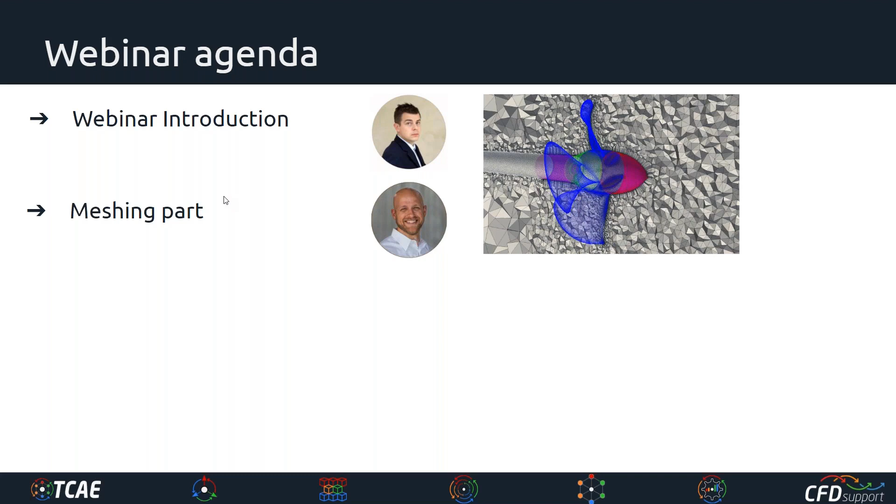So here's the agenda of today's webinar, it's simple, there will be 4 parts. In the first part, there's this webinar introduction, which is approaching its end. There will be a meshing part where Daniel will show us how it works with Pointwise. Then there will be the simulation part where Radek will tell us about the simulation. In the last part, as announced, there will be a Q&A session dedicated to your questions and answers. Feel free to ask your questions, and we will be happy to answer some right away in the webinar, and the rest will be answered later via email.

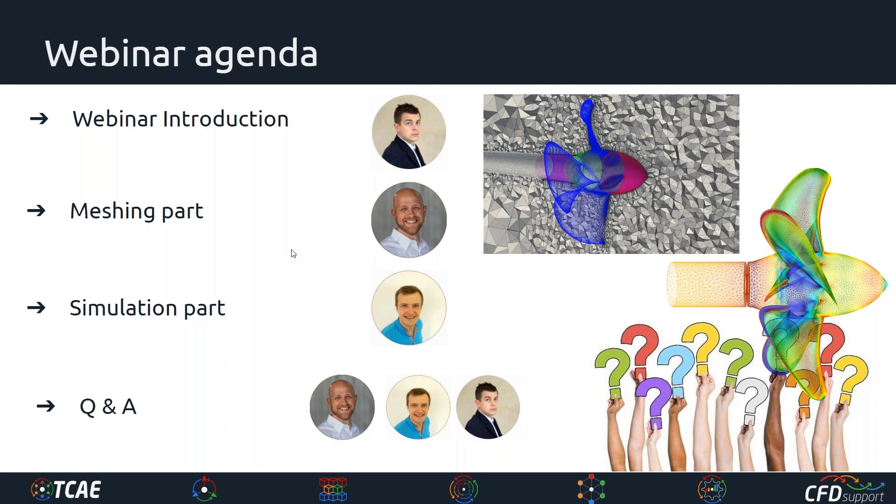Okay, so that's the agenda, and I'll say a little bit about the objective. In the beginning, we wanted to make something quite transparent and available. We wanted to show a very advanced simulation on a very advanced mesh created in Pointwise, showcasing the very best of CFD simulation. We were looking for an appropriate test case, and we found this.

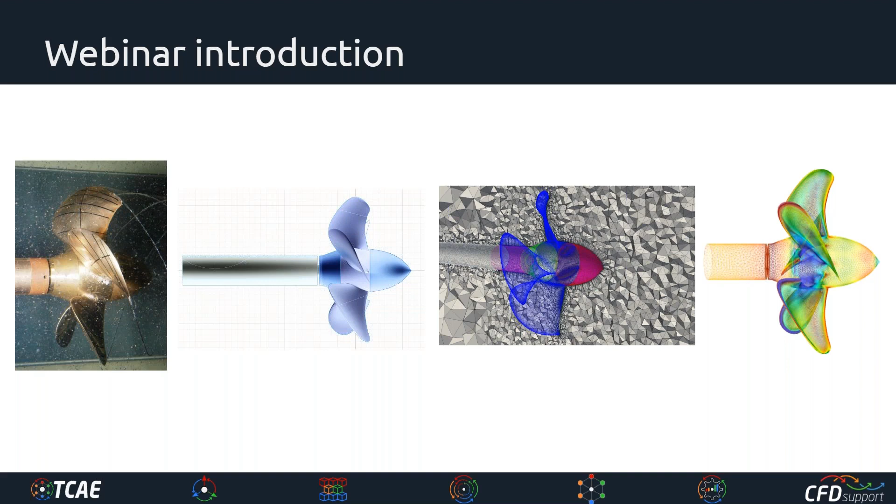Potsdam Propeller test case, which is very good for our purposes because it has been measured. It's a real facility, measured in SVA Potsdam, in Germany. So the measurement data are available, the geometry is available, and the whole case is extremely transparent and clear, repeatable anytime. It fits our purposes very well, because a typical benchmark has an issue of confidentiality, since the data is typically the client's and untouchable. This one is transparent, and the beauty of this test case is anyone can take it and repeat it anytime, checking again and again how it works and what its performance is.

So what we did is we asked our friends at Pointwise to create the mesh, and here at CFD Support we ran the simulation. We'd like to show you how it worked and what the results are.

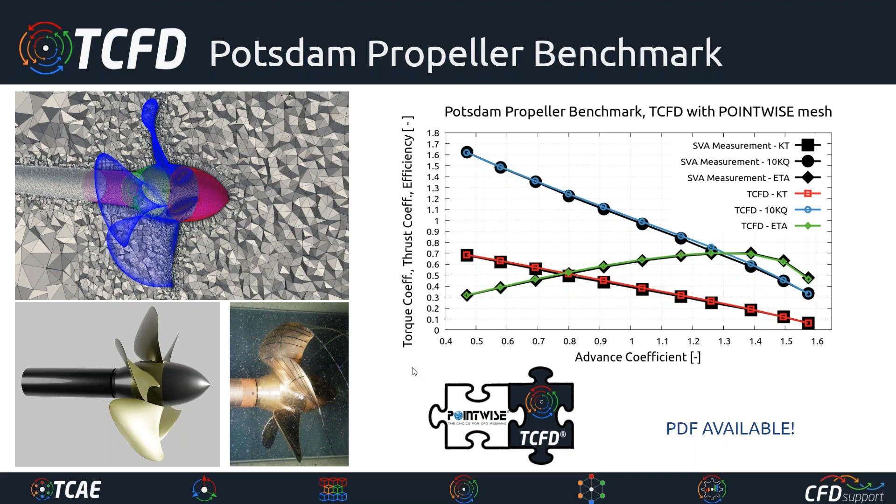Okay, so now it's time for the meshing part of the webinar. I'll hand over the presentation to Daniel.

Perfect. All right, so as Lubo said, my name is Daniel, and I'm a lead application engineer at Cadence Design Systems. We have been developing Pointwise, a program that's been in development for over 25 years, and I was responsible for the mesh.

To start, I'll show the whole flow domain. I used dimensions here in terms of the diameter of the propeller rather than raw dimensions, because Pointwise is dimensionless. It could have been dimensioned in meters, feet, inches, miles—we don't really care, as long as it's all relative to itself.

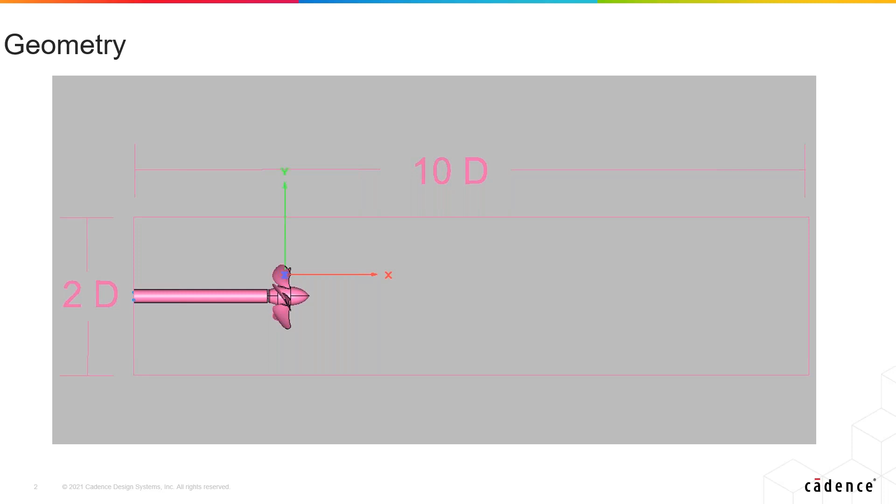Speaking about the CAD itself, for the most part it was pretty solid and good—most surfaces were rather smooth. We did have one area at the edge of a blade, and of course there are 5 of them, where it left a little to be desired.

Usually when you bump up against rough CAD like this, you have a few options. If you have a good CAD package, you can take it in and fix it, or talk to your CAD guy and ask him to fix it. We have a few tools in Pointwise that can handle this, but for this instance I used a different technique called fault-tolerant meshing, in which we put a smooth grid over top of this rough-looking CAD and then grow the volume domain from there. Pointwise is a bottom-up mesher, so we can do that.

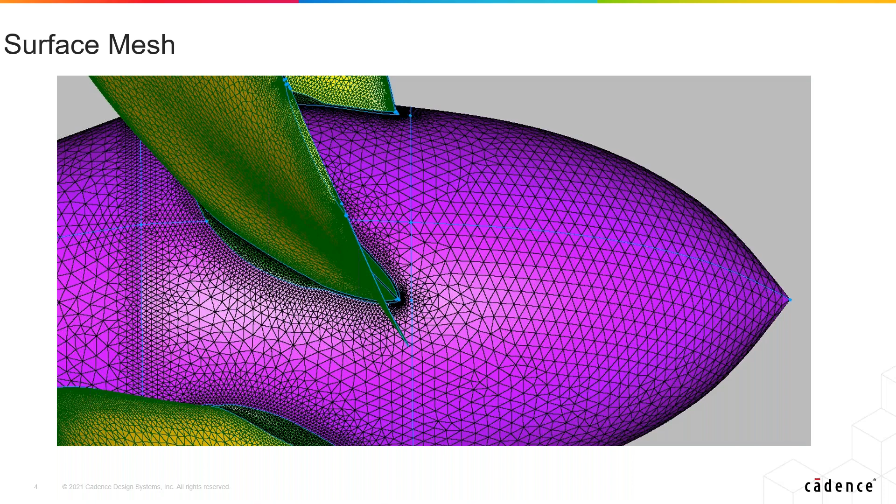Which gets me to the surface mesh. We used the Delaunay algorithm for the isotropic surface mesh, triangles only. Pointwise can handle mixed cells—we could have done combined cells here—and there are also other algorithms available in Pointwise, such as advancing front ortho. But for this, we mostly stuck to Delaunay and kept a fairly high boundary decay.

So what that means is that the number of points on the boundary, on these blue lines, carry fairly far into the domain before they start broadening and getting bigger.

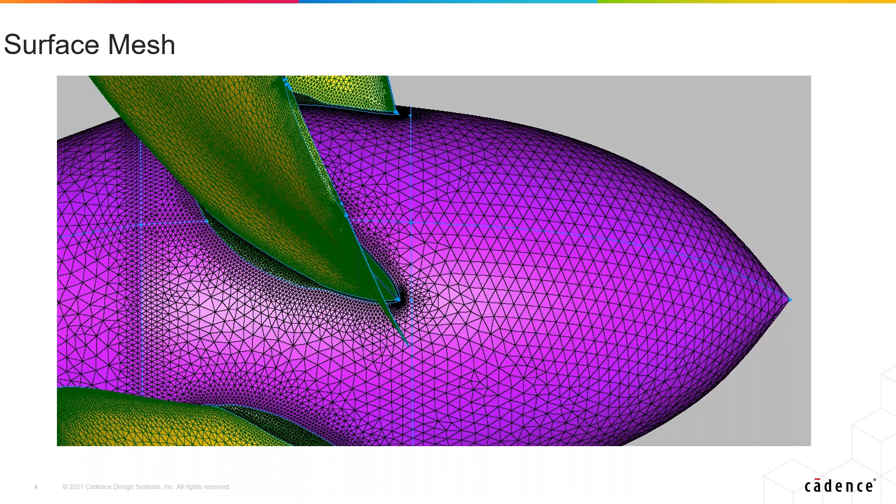For areas of high curvature, like on the blades, we use a technique we refer to as T-Rex. In 2 dimensions, the user can specify an initial step height, and anisotropic triangles are grown off a boundary edge. The user can also specify the growth rate, and these anisotropic triangles are gradually stepped until they reach isotropy, at which point the Delaunay algorithm takes over for the remainder of the area. You can see it's done here on the gold portion, marching in all the way to isotropy.

The green portion is the fault-tolerant technique I referenced a couple slides ago. For this technique, we laid a structured domain over it, then took that structured domain and cut each cell in half to make 2 triangles. It's a tool we call diagonalization. You can see that was done here in green, on the green portion.

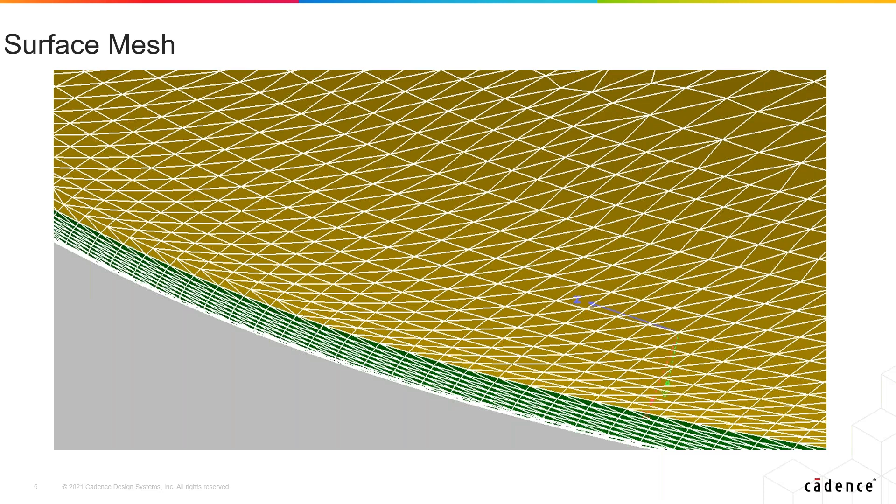Overall, we had about 600,000 surface cells with a maximum angle of a little more than 130 and a maximum area ratio of a little less than 4. Overall, we were happy with this surface mesh. That was a really strong quality surface mesh.

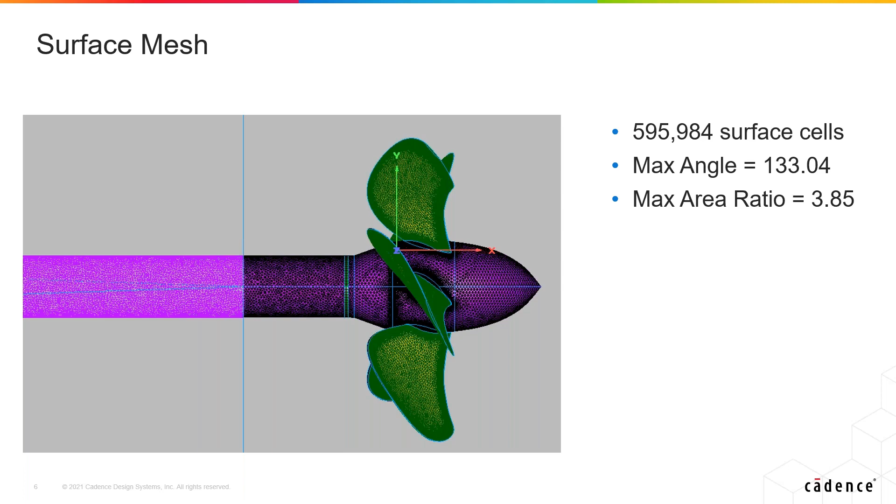And with that, we built our volume mesh. This is a cut straight through the propeller, and you see there are 4 different cell types utilized here. The first I'll talk about is the red tetrahedrals, which make up the bulk of the domain once you get away from the propeller itself.

The prisms, shown in green, are formed by that same T-Rex algorithm, but rather than in 2D, this was in 3D. So rather than stepping to make triangles, a 2-dimensional shape, these step to make anisotropic tetrahedrals. Same situation - the user can specify the initial step size, the growth rate, and even set specific stop criteria, so the algorithm can stop locally rather than as a universal front. That's why you may see little areas where the prisms extend a little further into the mesh. Again, the goal is to reach isotropy, and then it transitions to tetrahedrals.

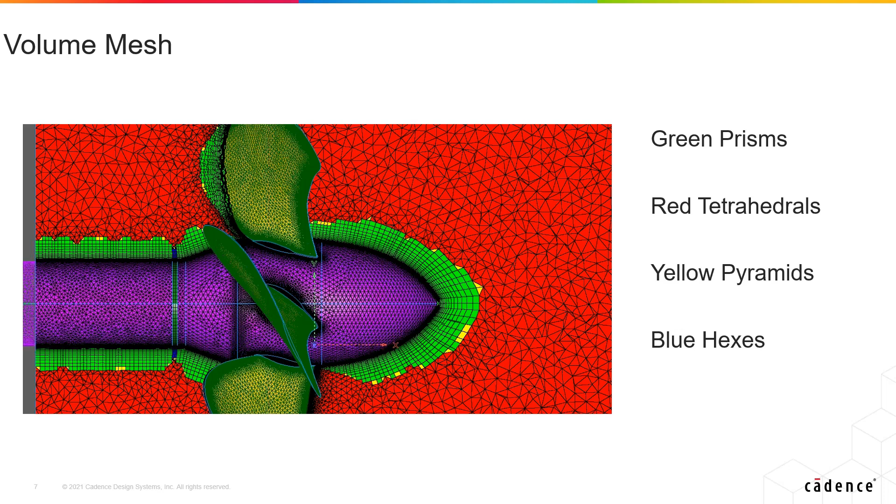After all of the anisotropic tetrahedrals are created, they're combined for cell reduction to make green prisms. If the T-Rex algorithm is grown off of quadrilateral cells, the cells are then combined to make blue hexes, which explains why there are a few blue cells around the shaft. The yellow pyramids are there simply for transition regions to go from prisms or hexes to the tetrahedrals.

For a picture of the greater flow domain, we have the region around the prop, which we already discussed - there's about 12 million cells there. A little further downstream, there is a rotating reference frame region, made up exclusively of tetrahedrals, with about 2.6 million cells there.

Outside of that is the stationary region, which is mostly TETs. There are a few prisms adjacent to the shaft, again using the T-Rex algorithm and some cell reduction, so we could capture any boundary layer phenomena there.

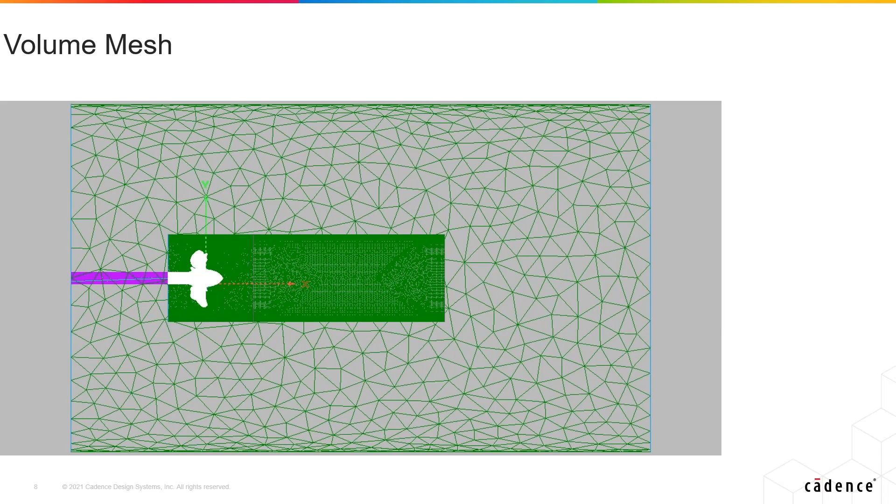And that brings us to the stats. All told, there was about 17 million cells for this mesh. The maximum angle was a little less than 170, and the average was closer to 100. The maximum volume ratio - we did have a few outliers closer to 30, but that was atypical. Most cells are closer to an average of 1.5, and the maximum centroid skew was about 0.86, but the average was closer to 0.123. This image shows a nice look at how T-Rex can be stopped locally and then grown to much further distances away at other locations.

So with that, I will pass it back to Lubos.

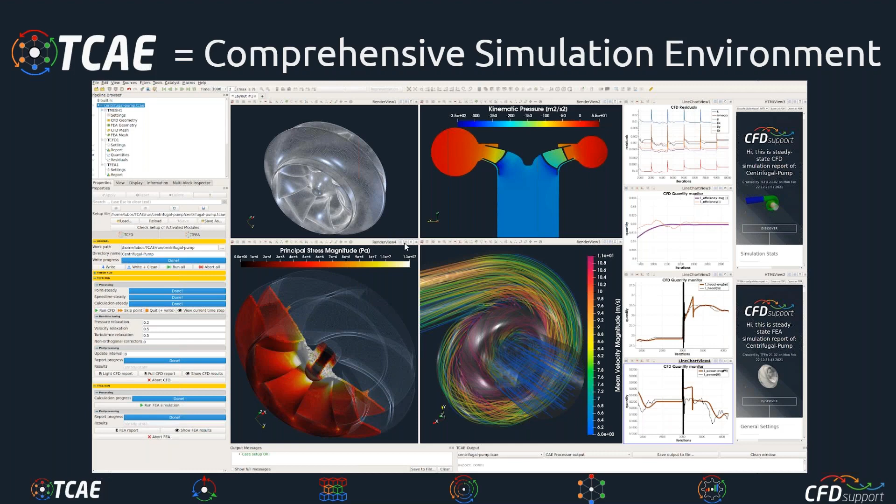I guess you know our company CFD Support was founded in 2009, and it's located in Prague, Czech Republic. Our main field is simulations, primarily CFD and FSI simulations of various engineering problems across the industry. Our golden egg is a product which is the simulation tool - we sometimes call it a simulation environment, because there are a lot of components you can combine and play with. In fact, it's a set of standalone software pieces, which we call software modules, and you can combine them together. No matter what other pieces of software is used together with it, it still works very well with various commercial codes, in-house codes, and other open source.

It's based on open source, which is common knowledge. And TCAE has a strong integration ability, so it fits existing workflows, and it's definitely ready for big industrial challenges nowadays.

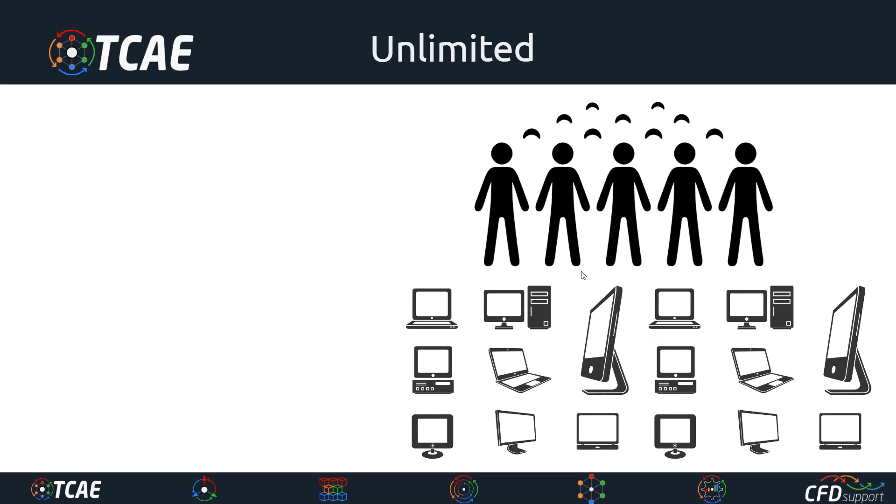I'll be very quick here, because Radek is waiting for his part. I know it. So I'll just mention very quickly that TCAE is special because it's unlimited in terms of number of users. There are no limitations in jobs, cores, and hardware installations. So it's quite attractive for these reasons, because users can use their resources to the fullest.

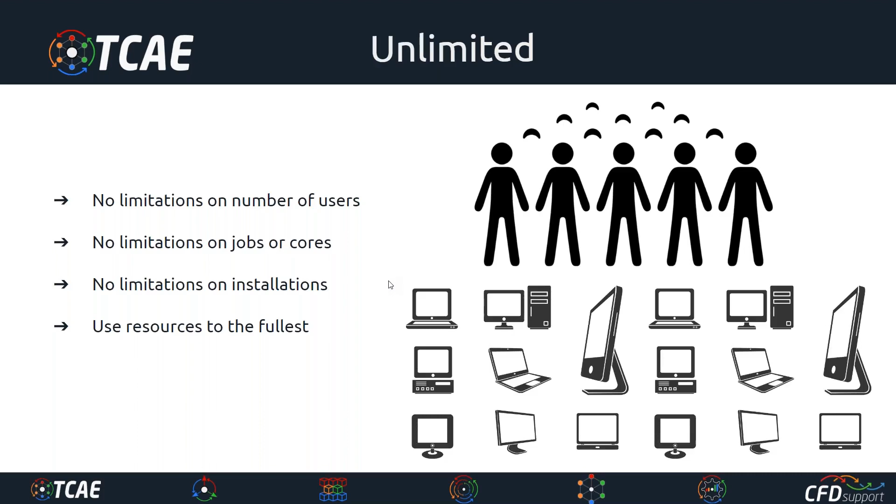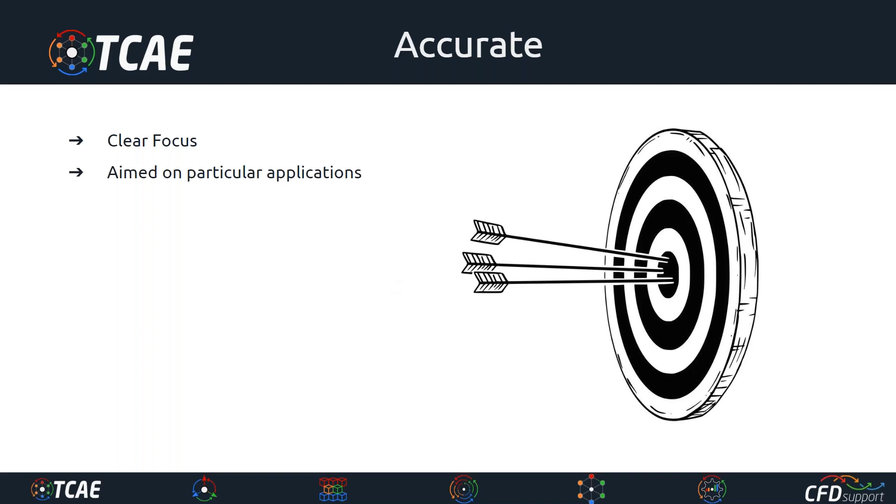And it's definitely accurate because it has clear focus. It's aimed on particular workflows, especially turbo machinery simulations and external aerodynamics. So for this reason, it's aimed and it can be accurate. It's definitely not a general purpose code.

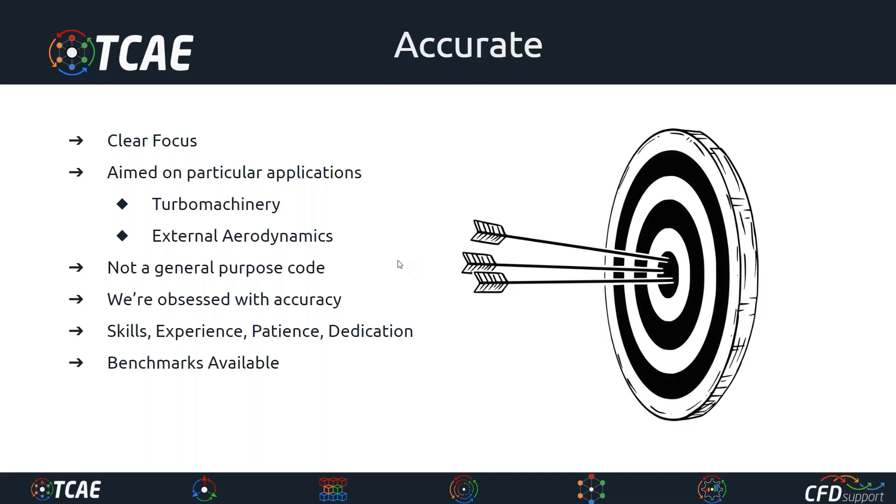Here at CFD Support, we are obsessed with accuracy. We believe that any successful project is a result of skills, experience, patience, and dedication. So it's quite a big deal to do the simulations for the industry. And there are a couple of benchmarks we associate with TCAE, and we are ready to show them, as you can see in this webinar. TCAE is highly automated.

And at the end, it's the user who decides how deep to dive into the problem, or not at all. So it can be used as a black box or as a highly sophisticated CFD or CAE simulation tool. It's the user's decision every time. And yeah, it's always under development.

We have a couple of ways we think about it. In the horizontal direction, we think about new tools, new simulation plugins, new modules, and complexity. And in the vertical direction, we develop TCAE in new applications, capabilities, and high-tech methods.

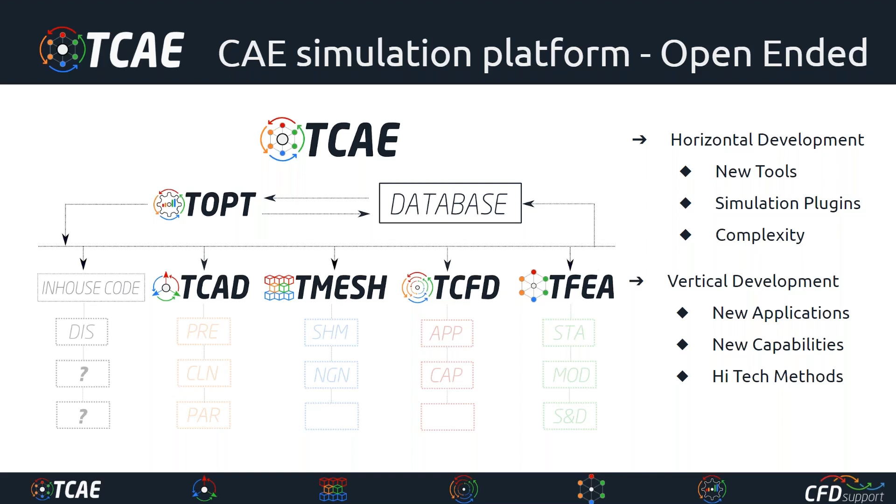In February we had a new release, which was quite big, and we are already working on the new release, which will be released in September this year. We are even working a little bit on the very next release, which is scheduled for February 2022.

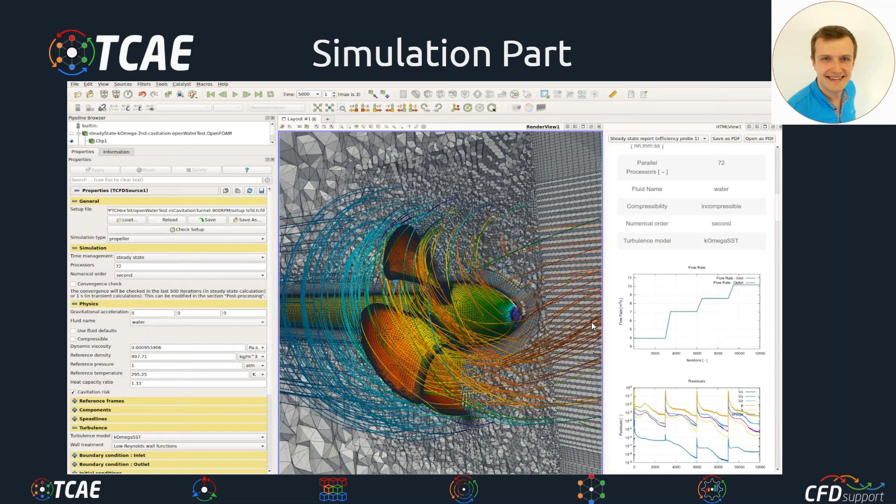Okay, time for the simulation part. So Radek, can you take over, or I will? Yes, so can you give me the presentation? Okay, yes, I will, I'm doing it right now. So I guess we can see your screen. So you can, okay, perfect.

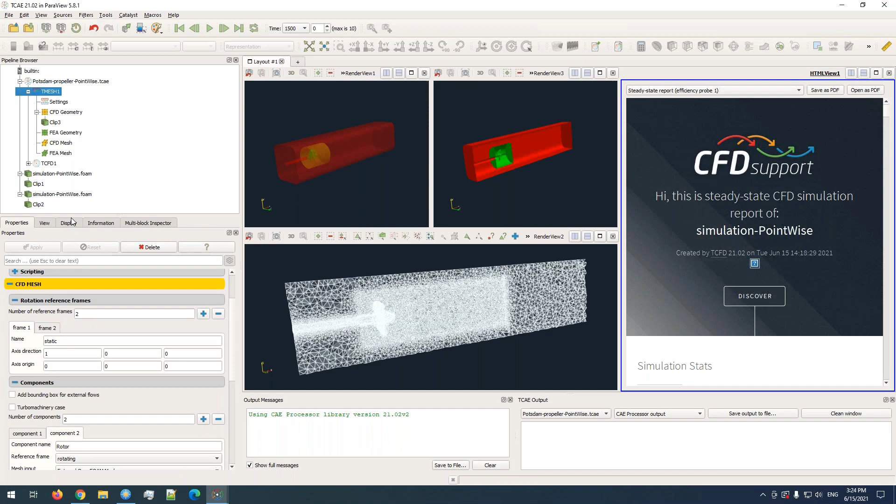TCAE consists of several components, and the component which takes care of meshing or importing meshes is called TMESH. In the setup part, there are just a few sections to use for reading the external mesh. The first thing we need to take care of is to set a proper axis of rotation.

Let's say, some kind to define the rotation and rotationally symmetric parts of the mesh. So here we simply set the axis of rotation and the origin point on the axis.

Then in the components, because we have one rotating and one non-rotating component, we create two components, and here we simply choose the proper mesh input.

Pointwise has the capability to export the mesh directly into the OpenFOAM format, so we can take that format, export it from Pointwise, and directly load it here. We'll just locate the directory in which the OpenFOAM mesh is stored, and it automatically loads the given part.

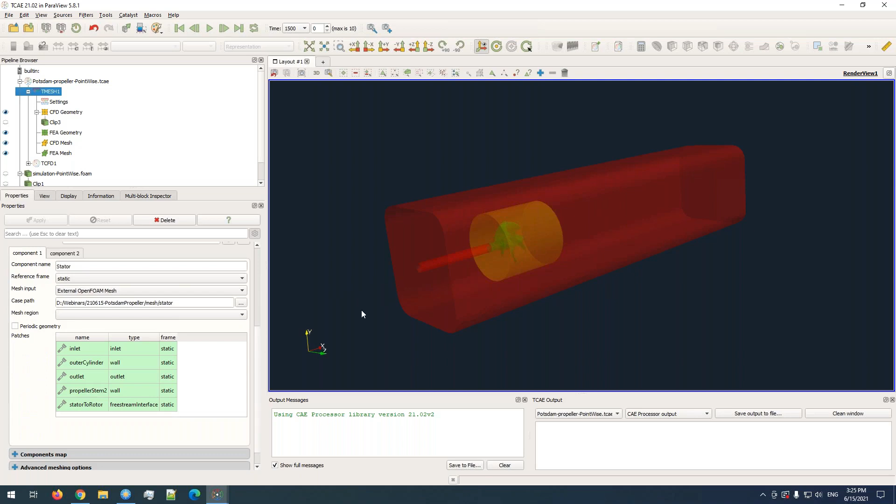So the first part is the stator part, which consists of the inlet. Maybe I can extend it. Here's the visualization of the axis. I can delete it, and basically we have several patches already defined in the Pointwise part.

So we have inlet and outlet, we have the outer cylinder or the domain of the flow channel, and we have the stator part of the stem of the propeller, and we have an interface to the rotating part which encloses the propeller itself.

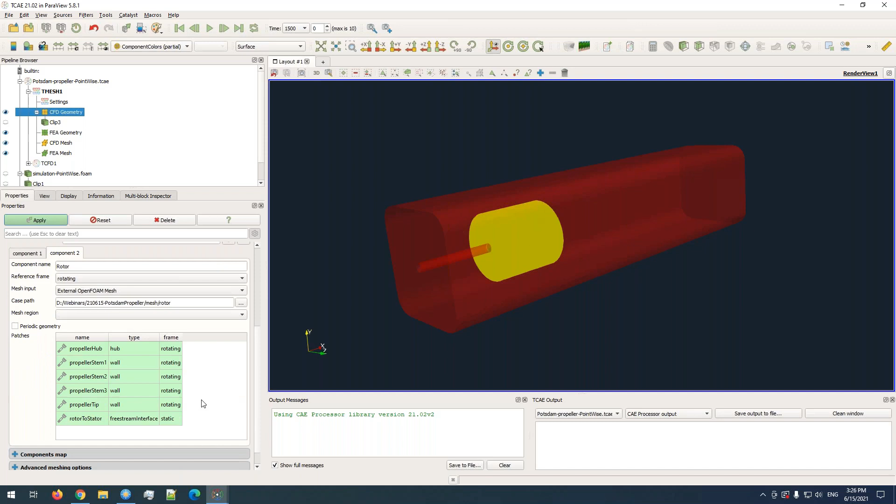And then we have the second component. Again we just use the external OpenFOAM mesh, locate the particular mesh, and set it as rotating because this part will be solved in the rotational framework. Then everything is automatically loaded, so all the parts of the propeller we can see here.

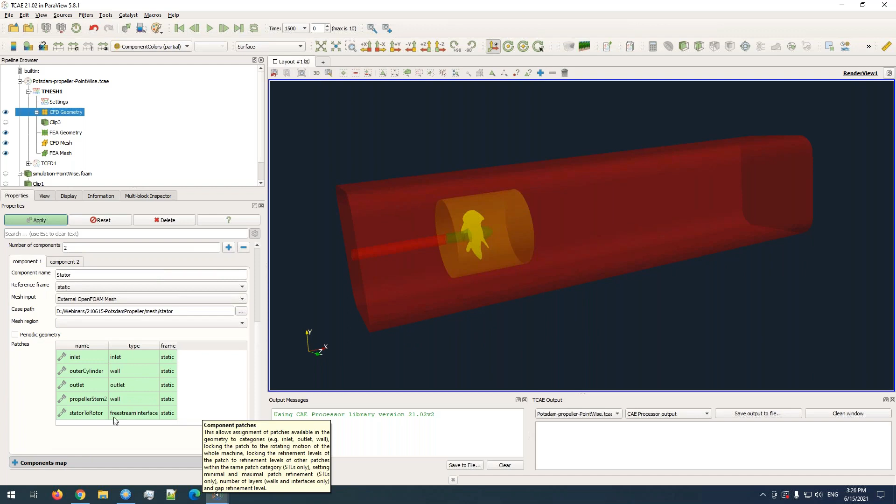So we can visualize each part, and of course the blade itself. All these parts are set as rotating, and basically that's all we need. The only part left to be done is to connect these stator-rotor interfaces. We can just right-click and connect it to the proper stator interface from the rotor part.

Now here we have just one couple of interfaces, so we just basically set the only option here, and that is all. All the other options are connected to the direct meshing with SnappyHexMesh, but for high quality meshes on particular applications, it's always great to have some external meshes loaded and use your high quality mesh, as in this case from Pointwise.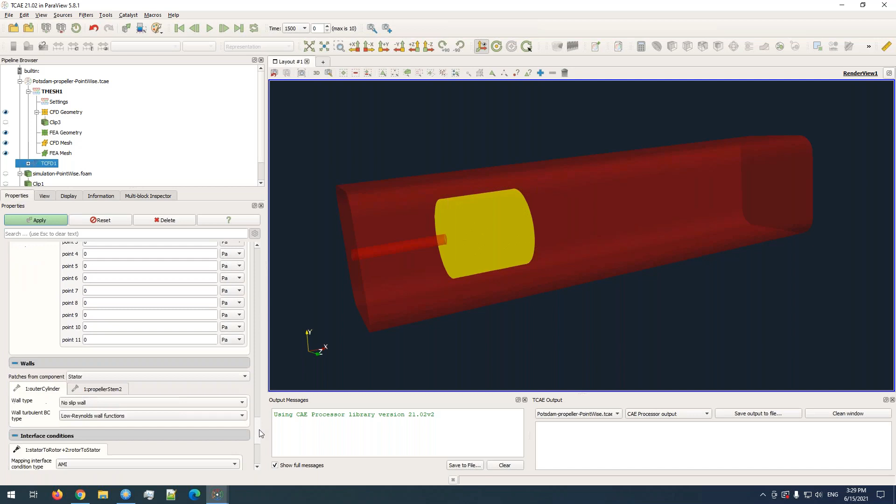Boundary conditions are here set by the inlet velocity vector. This follows the experimental data, so then we can directly compare given points to the measurements. At the outlet, just a fixed pressure with zero relative or reference pressure is set, as for standard incompressible simulations. Because the mesh is nicely resolved, as Daniel showed us, we are using low Reynolds wall functions for each wall part. The connection between rotor and stator is done by AMI, or basically it corresponds to the frozen rotor, and some reasonable guess for the initial conditions.

Then a few additional steps for the report. So what are our preferences for the units? What we would like to evaluate in addition, some blade-to-blade views or meridional average, or any other post-processing and miscellaneous parts can be set here for additional export. And so the setup, if you follow the measurement and the test data, you will set up pretty quickly. The mesh is loaded pretty quickly, so then you just need to run the simulation.

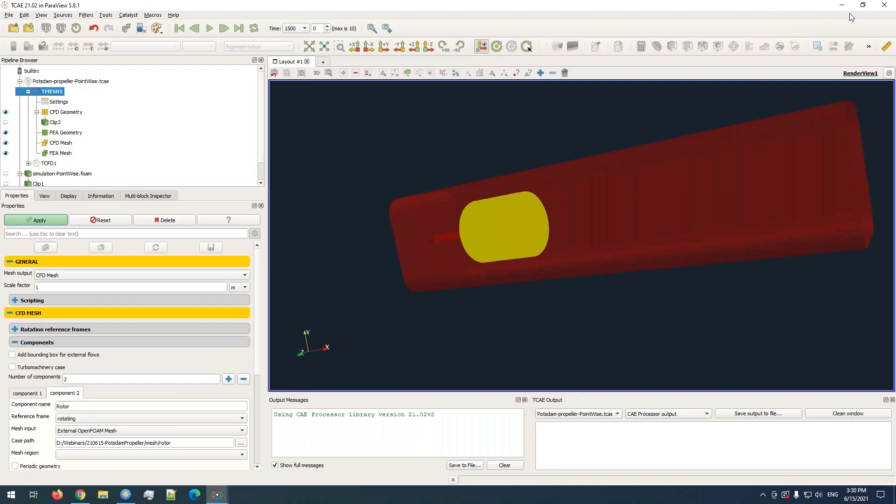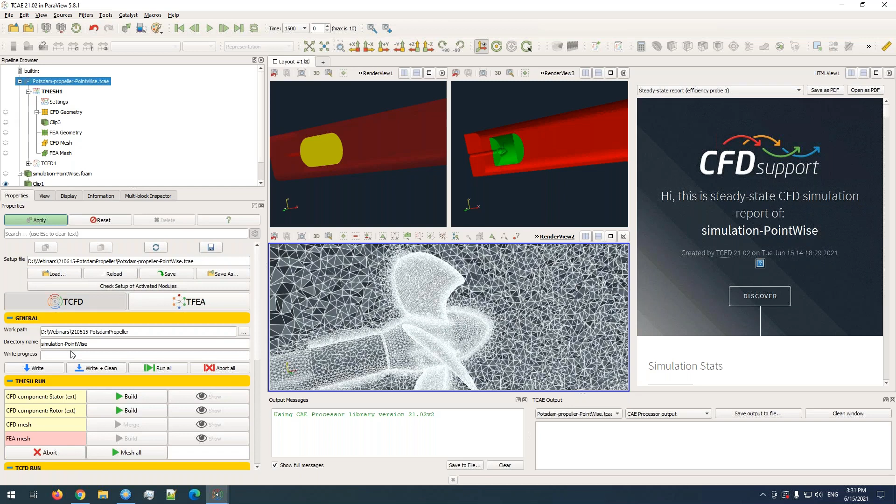So I will jump in time a bit. Before we run the simulation, we can visualize the mesh which is imported. Daniel already showed us the topology and explained how it is generated, so we simply just take it and run the simulation. We can go to the general section, define the directory name and hit the run all button, and everything is run automatically, all the steps.

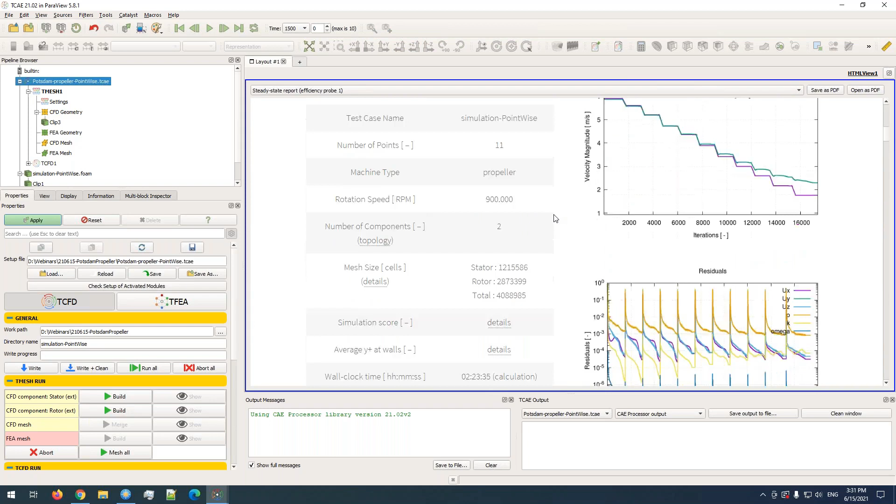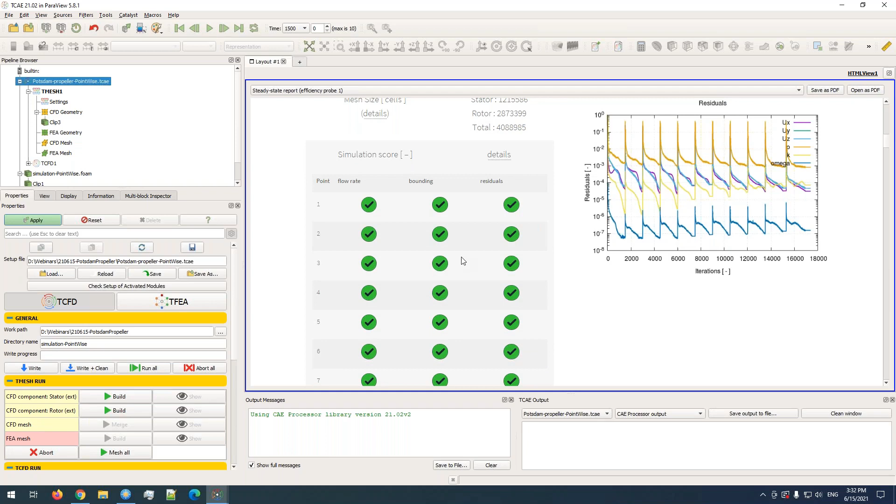Whenever the simulation is finished, an automatically generated report is created where we can read all the data, like simulation statistics, statistics about the mesh, about the Y+. What is new in our new version is a simulation score, which shows you if some criteria are satisfied, and if not, you should be a little bit careful about the results. Then you should check the boundings or if the residuals are not converging well. It will show you indicators, an orange warning or red to be very careful of the results. Sometimes the simulation is not converged well, so you should recheck the input parameters, if everything follows the physics of the machine and so on.

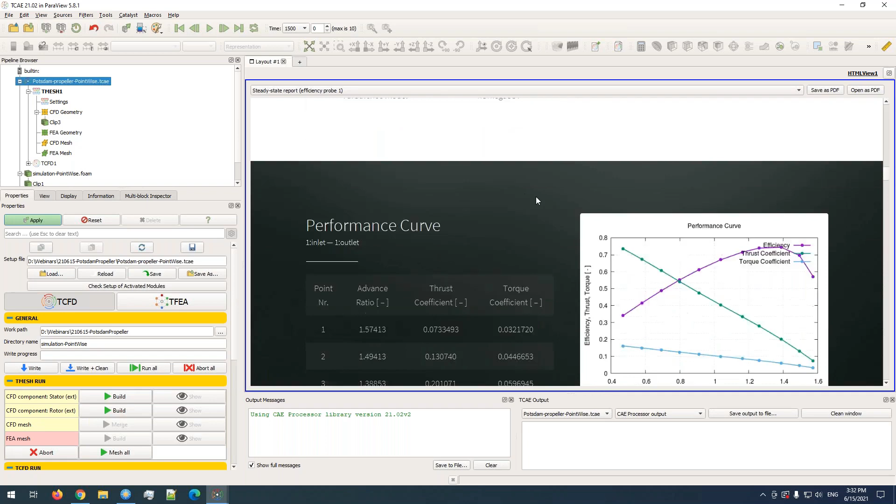We can read also some simulation statistics. The simulation took almost 2.5 hours on the 96 core machine. We used a second order numerical scheme, and the main output is this performance curve, which is a typical output for propeller simulation and analysis. In one graph we can see the efficiency of the propeller and the thrust and torque coefficients. We can then take this data and compare them with the measurements. So this we have done.

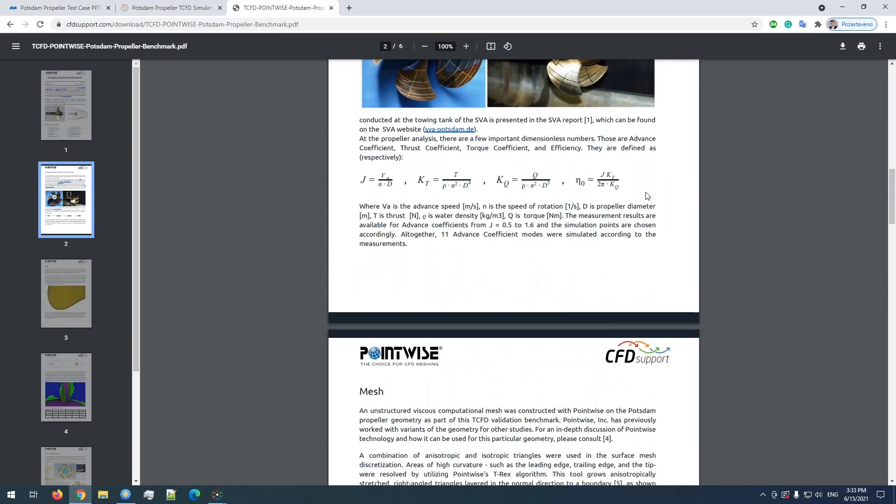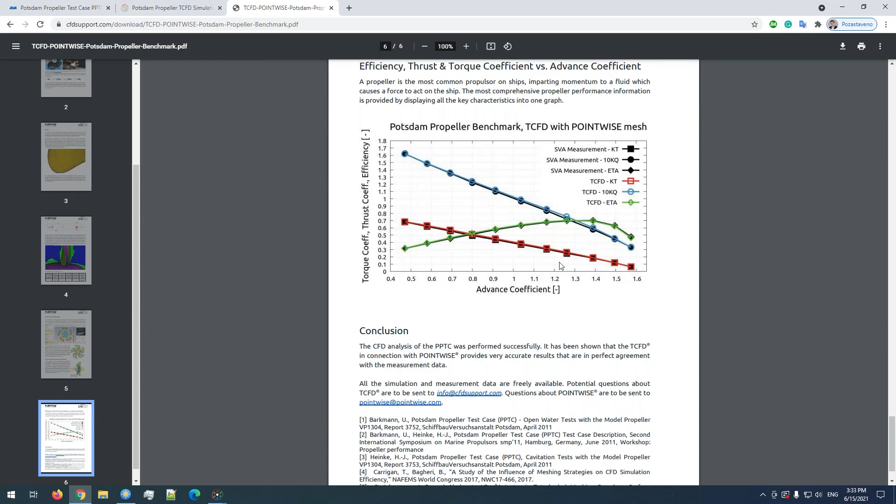If you go to the Potsdam propeller and see the PDF report, which is opened here, you can read about this test and this benchmark, and at the end these are the main coefficients, the formula for them, and as an output we can see a nice comparison between the measurements and the TCFD simulation results on the Pointwise mesh. We can see very nice correspondence with the measurement data. So these are really brilliant results of the solver from TCAE and the mesh generated in Pointwise.

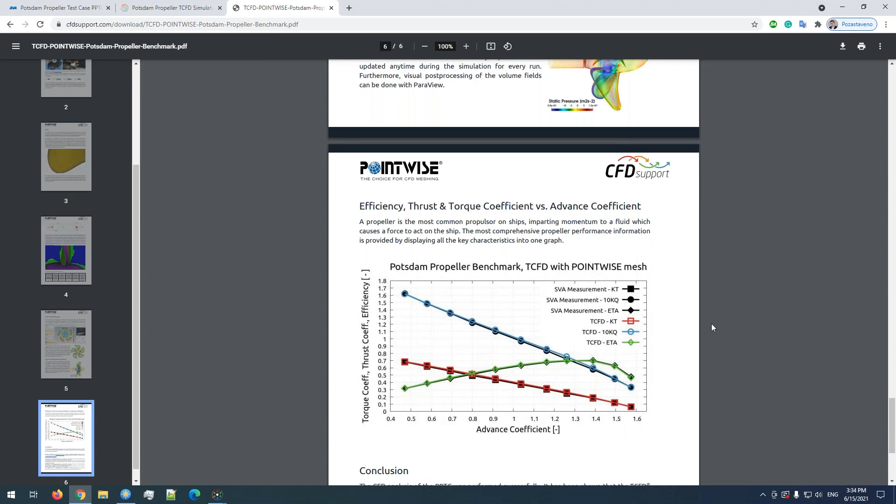So basically you can play nicely and really validate the solver like here. We did several meshes with different refinement, and finally we went to the finest mesh which Daniel showed us, on which we got really nice results with pretty awesome accuracy.

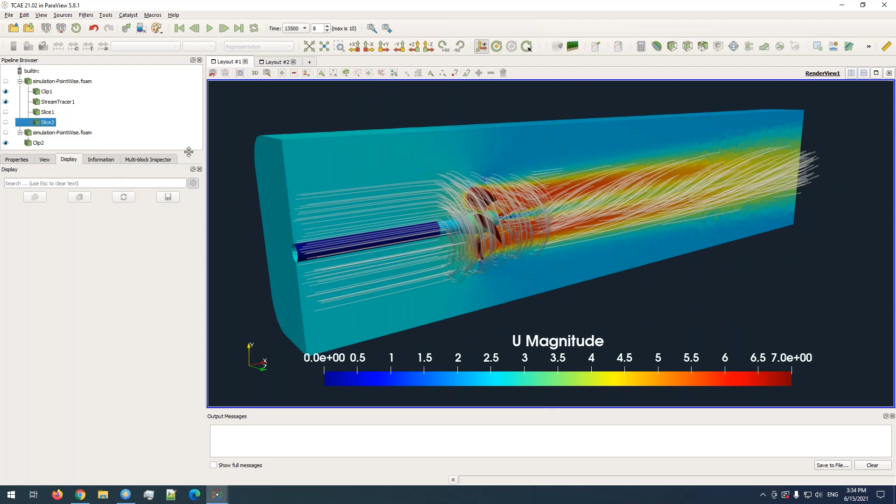Additionally, after the simulation we can do some visualization and analyze the flow pattern. We can combine any filter which ParaView provides, and we can visualize all the details, all the fields which TCAE stores.

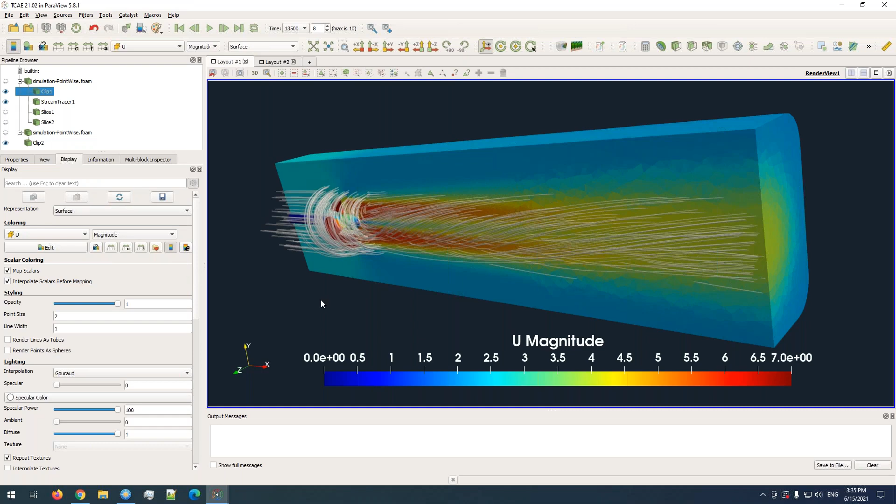Also, there is a cavitation indicator, but the simulation is not focused on cavitation itself. It's just an indicator of where cavitation can occur. So it's just kind of post-processing for the steady-state solver.

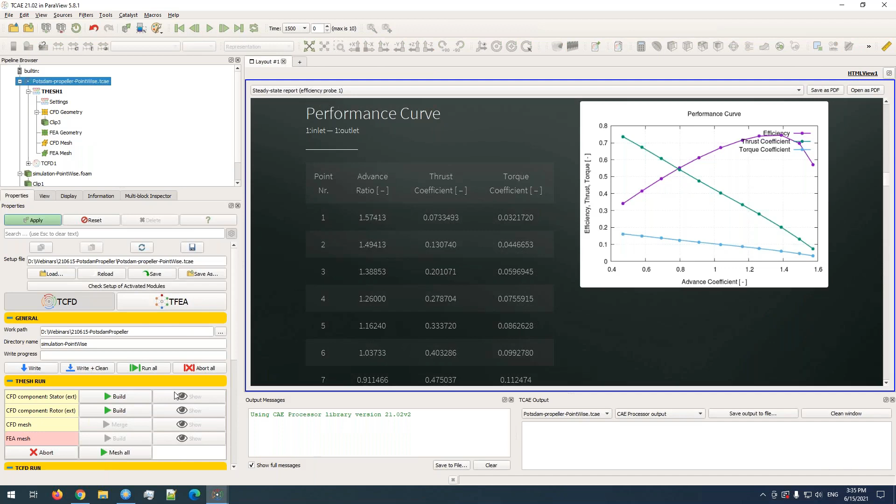Maybe the last thing to do, because this version of TCAE also implemented FEA analysis, so we can simply take the results from the CFD and use some kind of FSI simulation for the finite element analysis. So we can also analyze the solid of the propeller itself.

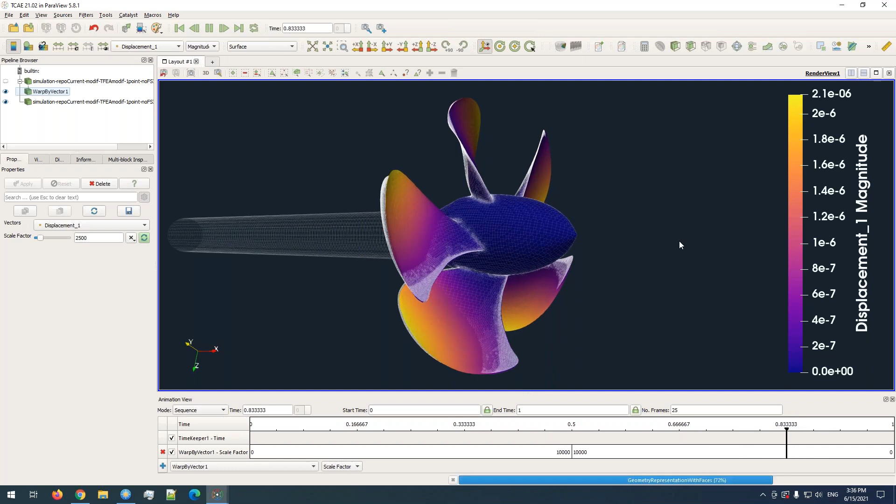As a result, we can see, for example, the displacement analysis. You can visualize the displacement on the highest load of the blade. And you can also, as I will show you in a few seconds, perform a modal analysis and see what are the frequencies, eigenfrequencies, and so on.

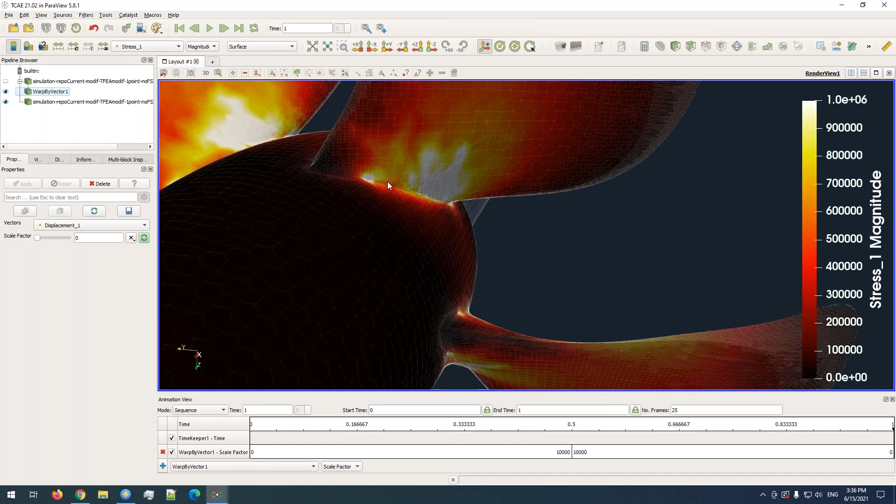So this is typically two main outputs: the displacement, then of course the stress. So we can locate where the highest stress occurs for the propeller, and check if it's in the correct range to be able to work at the given conditions.

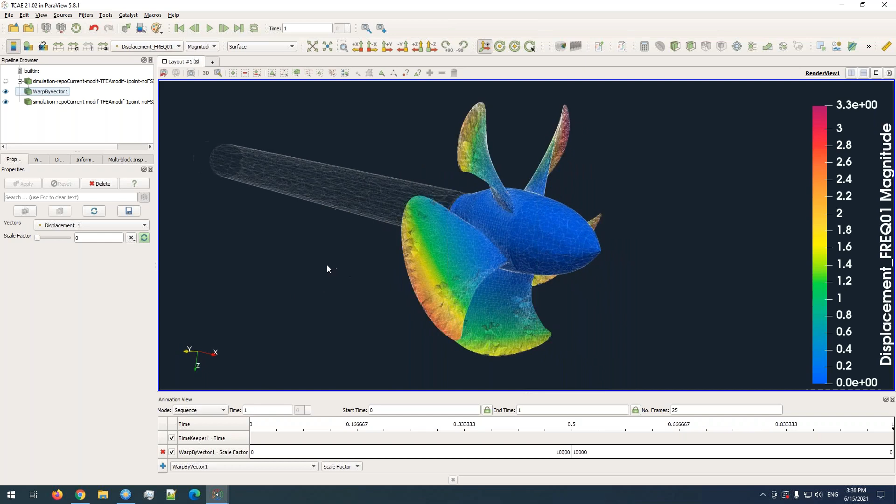And you can also see some displacement for the modal analysis, the eigenfrequencies, what is the stress, and so on. This can be done in the GUI.

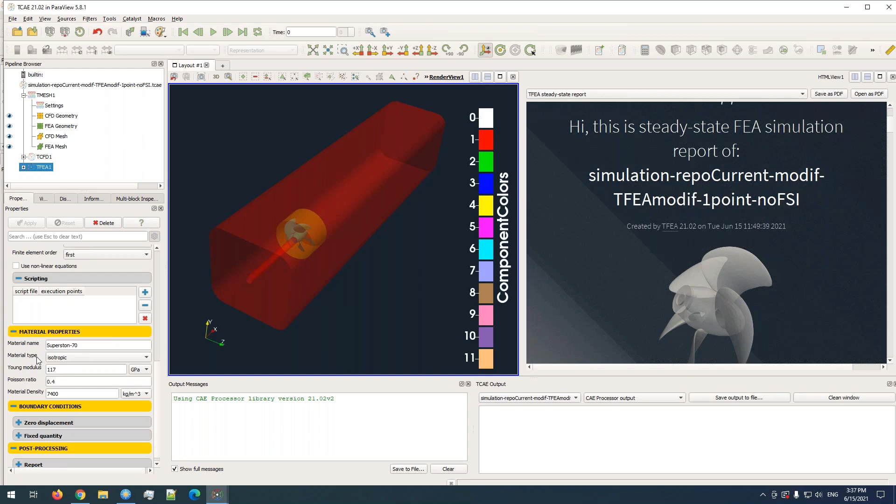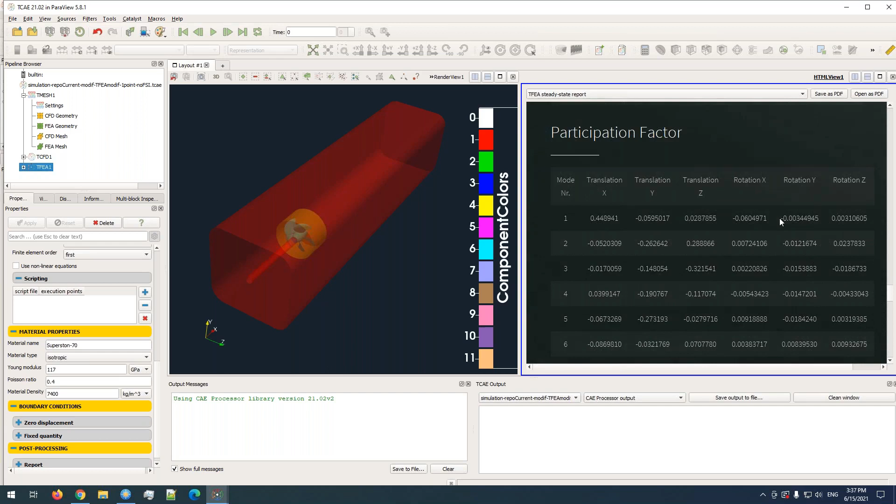Then you simply add some additional basic parameters of the solid and run the simulation, for which you get also the HTML report with tabulated values connected to the static analysis and to the frequency analysis. So you can see the eigenfrequencies and some participation factor connected to the modal analysis.

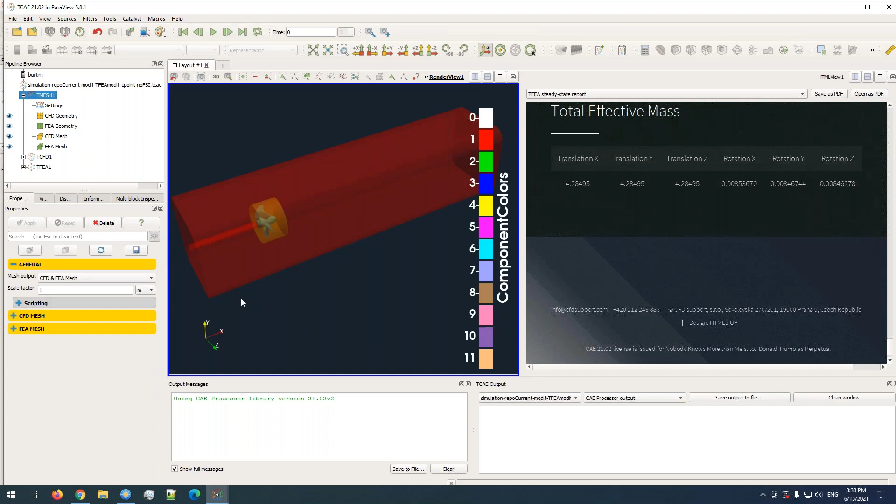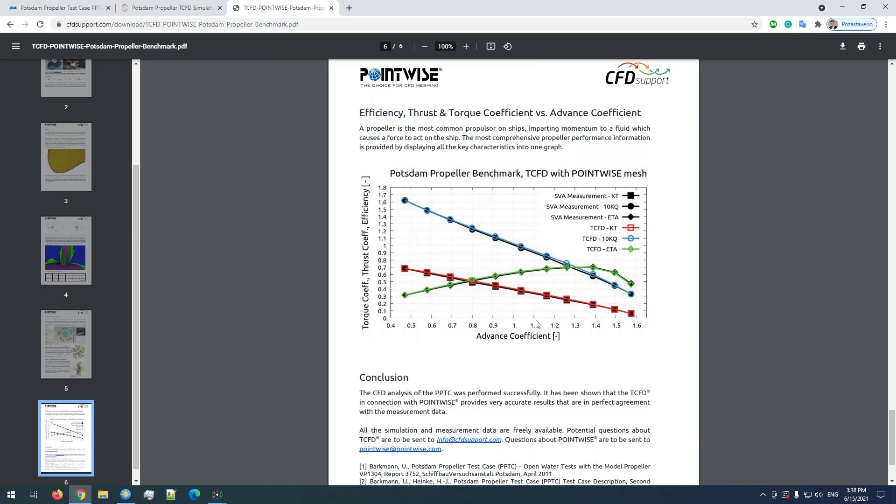All right, so that's basically all from my side. I would like to emphasize that importing the external mesh is really a job of several minutes to import and load, and then the process for CFD or FEA simulation is very similar whether you're using the inbuilt mesher snappyHexMesh or any external mesh. As we can see, the output of both Pointwise and TCFD is brilliant, and you can really get outstanding results using these two tools.

So I think that's all from my side, and I will give the presentation back to Lubos. Thank you, Radek, for your contribution. It was great, thank you.

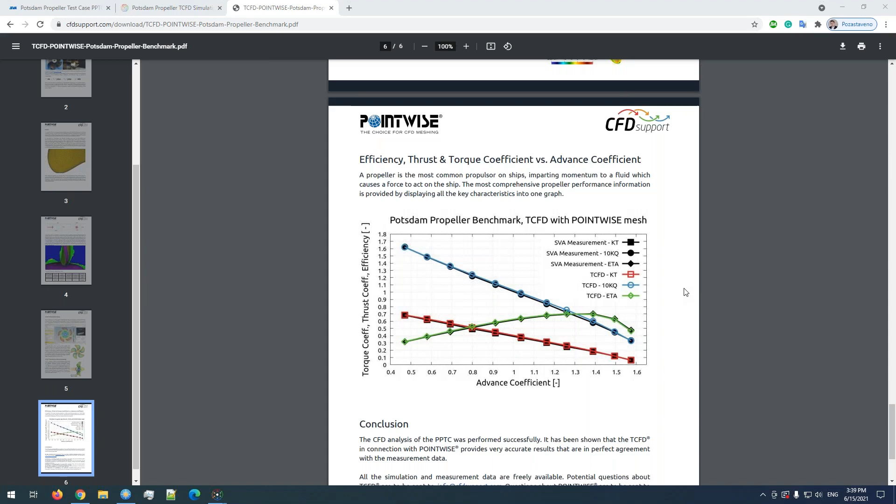So I'm taking back the screen, and I guess... can you see my screen now? Well, yeah, there's the welcome screen now. We don't see your monitor yet. Okay, so maybe something has gone wrong. I think we should wait 10 or 15 seconds more. Okay, I see, it's this typical issue. Okay, a couple of seconds.

So the beauty of this test case is it's a mix of turbo machinery and external aerodynamics, right? It's an object which is rotating, but it's rotating in an open space, despite the measurement being done in a tunnel. So in general, it's an open space, a marine propeller, so it's a very good case for this reason.

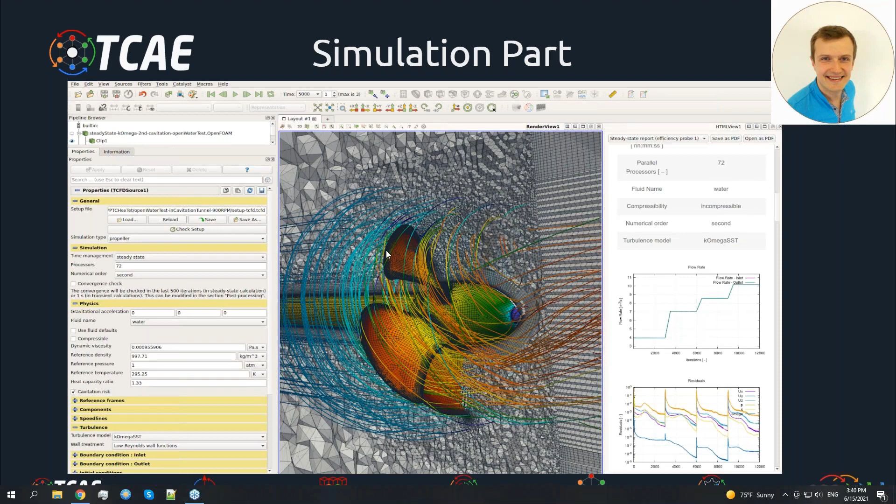I'll ask my colleagues if my screen is visible. Yes, it's on, so you can see it now. Okay, perfect. So yeah, now it's time for the questions and answers. It always takes some time until the first questions start coming. So let's see.

So ask your questions. In the meantime, I will ask Radek, how much time would you guess it takes to run such a project? Because it still is a project, right? You start on Monday morning, and when such a PDF report is done, how much time does it take of your work? Well, it's always hard to say, but you need to be really careful going through the benchmark and through the measurement to really set the case properly.

You need to be careful about the geometry topology, about all the setups and all the boundary conditions and so on. So you should be very careful what to set, because with any changes in the topology, or if you maybe take some measurement for an open channel and not a closed channel, then you will get different values.